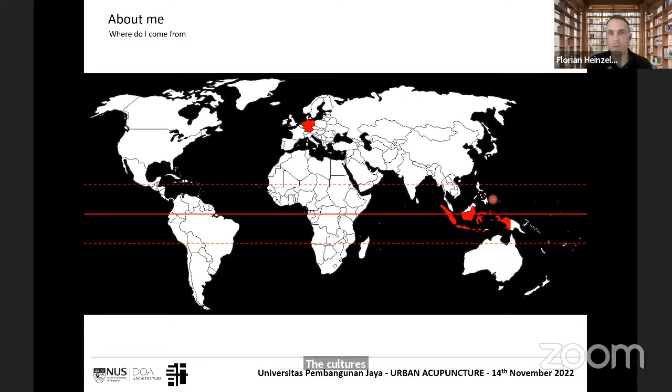Coming from the Northern Hemisphere to Indonesia, having lived there for 6 years and now in Singapore, I had to do a lot of unlearning, relearning, rethinking our architectural practice, simply because the cultures of building are different. A very formalized rational approach, which you maybe learn in Germany or the Netherlands, does not necessarily apply in a more informal economy and way of doing and executing architecture in Indonesia. I find this quite interesting. You will also see later in terms of architectural culture and vernacular architecture.

This is a slide I always show my students at the beginning of the semester. This is an early photo from the pandemic, which was going around in diverse WhatsApp groups in Indonesia. People who are supposed to social distance are not doing it, they're mingling partly without masks. A lot of people were sending this around as a joke, ha ha ha, kampung guys and so on.

But actually what we see here is a really basic design problem. They're putting their shoes as a placeholder, but it's a climatic problem. People always gather where it is comfortable, right? So they're sitting in the shade. If they were in the sun, it would heat up and they'd have no space to sit. So if you want people to behave accordingly, the first thing you need to do is enable a certain level of comfort for them. With some umbrellas and some stools, it would have been easily solved, or at least better. It wouldn't completely solve the social interaction issue because you're queuing, but that's also why it's called social distancing, it's meant to be like that. But if you don't provide the basics, people won't obey your rules.

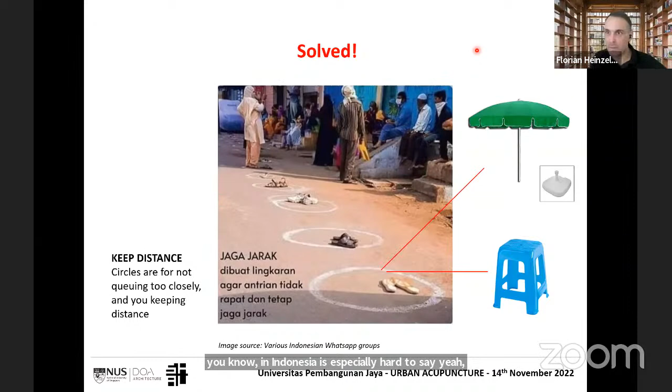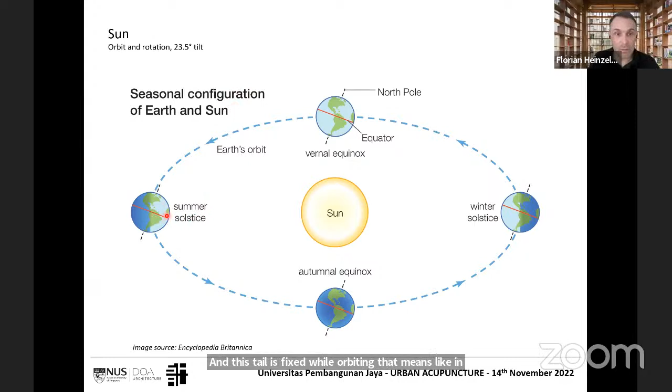Also, what I often show is the very basics—forgive me if you know it already, it's just a reminder. Our planet is orbiting the sun in 1 year and has a tilt around which it spins, and this tilt is fixed while orbiting. That means in summer you have a different angular relationship in this rotational tilt towards the sun than you would have in winter. So for a place where I come from, like Germany or the Netherlands...

If we take the perpendicular towards this point where I'm standing and project the sun angle, I have a relatively high sun altitude in summer and a relatively low sun altitude in winter. But in both cases, the sun always comes from the south. In winter it's cold, so I'd like to utilize the sun for passive heat gains. In summer I'd like to block the sun, because it's getting around 30 degrees, and in recent years even more thanks to climate change in Germany. So I can already design with these angles and have a big influence on climatic design and comfort in the building, and also energy usage—if I can block the sun, I do not need as much air conditioning or heating in winter.

Now if you go to Indonesia, it's an entirely different story because it's almost at the equator—parts of it are at the equator, say Kalimantan, and Java is a little bit south, but it's true for both cases. If you place yourself here vertically and look at the sun angles, in June the sun comes from the north, and in December the sun comes from the south. But the bandwidth of these angles is really overhead, coming from the zenith. So I have a completely different combination of angular relationships of the sun in relation to the climate, because most of the time I'd like to shade the building, and I have different possibilities to do so. So the form of architecture needs to react to that. Again, if you look at the overview, you see the sun path at the equator comes from both sides.

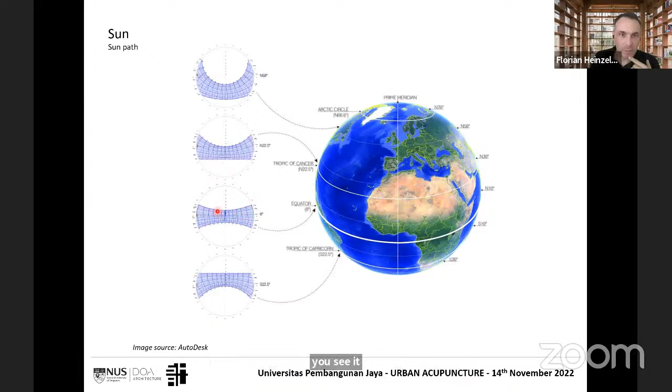Where I come from, the sun comes only from the south, but if you go to Australia, you'd have the sun coming from the north instead. So it's really important where you operate on the planet, and what climatic strategy for comfort and livability you're applying. That's not only about sun angle, but in the larger sense,

we have different climatic zones on the planet. The hot desert climate is much more severe, I'd argue, than the tropical climate we have in Indonesia and Singapore. And of course the humid continental climate in parts of Germany and the Netherlands is completely different, with 4 seasons. So this needs to be kept in mind.

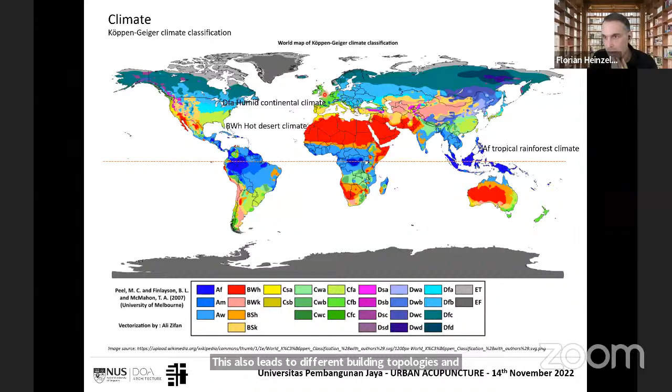Interestingly, this also leads to different building typologies and behavior, which we'll see in a second in these different countries, as an example with vernacular architecture.

In December we have less than 12 hours of sunlight, more like 6 hours, versus in summer a much longer daylight period. That leads to completely different behavior, because in winter we're more inside — it's raining, snowing, cold — but in summer, a lot of people appreciate going to the beer garden, sitting outside, sitting underneath the trees.

So it's a completely different behavior of using spaces, outdoor places, and the city, compared to, say, Indonesia. There, throughout the year, the sun rises around 6 and sets around 6 — you have 12-hour sunlight all the time.

In that sense, sunlight doesn't change people's behavior much, because it's the same throughout the year. For instance, if you have a small son and want to put the kid to bed, it's an entirely different story in Europe than in Indonesia. In Rotterdam, the sun goes down roughly at 10:30 around the 21st of June — full daylight at 10:30 — and you tell a 5-year-old it's time for bed, and they look out the window and say, 'but it's still bright outside.'

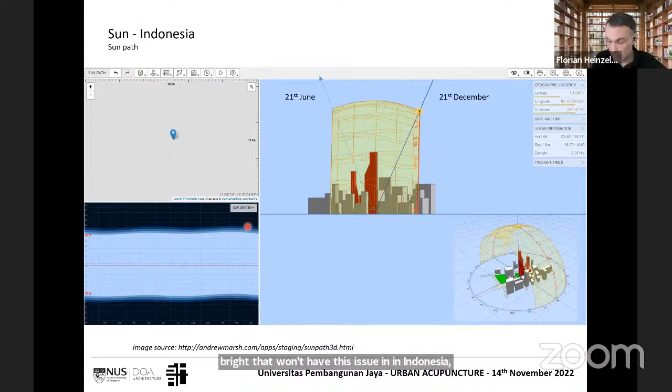You won't have this issue in Indonesia, since it's the same throughout the year. As a comparison, if you go to the North Pole — maybe you remember the horror movie 30 Days of Night — in summer around the 21st of June, the sun never sets, it's 24 hours bright. But in other parts of the year, the sun would need to shine through the planet, which isn't possible, so you have eternal night. So how do we design for that?

One design tool to look at is the psychrometric chart, which maps relative humidity from 100%, 90, 80, 70, 60, 50 and so on, against dry bulb temperature — 0 degrees, 20 degrees, 25, and 30.

What this mapping does is describe a zone of comfort where humans feel comfortable, and in blue it's mapped out throughout the year how many hours fall into which zone.

Generally speaking, there are some differences based on the clothing factor — what you're wearing, how warm or insulated you are — and your activity level, your metabolic equivalent, how much you move around.

But in general, humans feel comfortable between 20 degrees, in the range from 80 down to 20% relative humidity, going up to 25 degrees. If it gets warmer, you need to reduce humidity — the hotter and more moist, the less comfortable people feel.

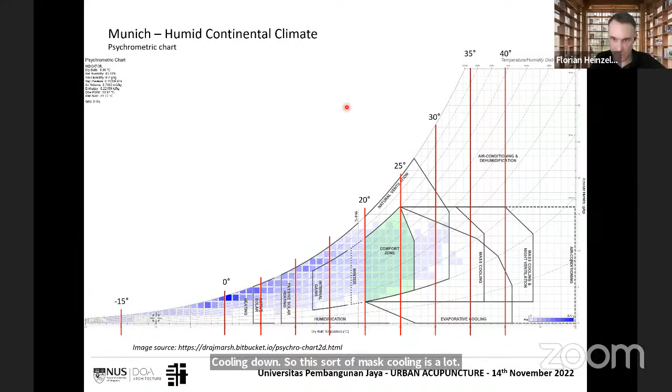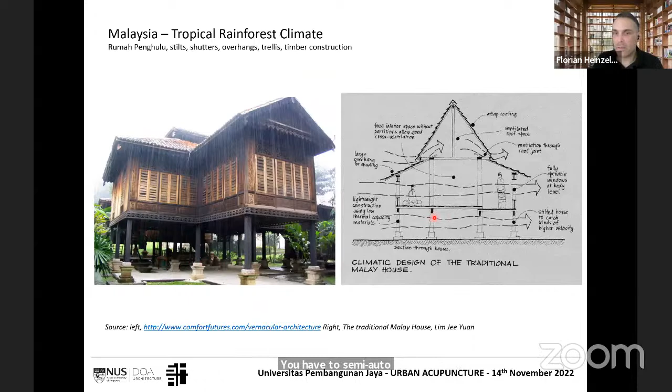But you see already, we're talking about socio-climatic spaces. This sort of architecture is also built around social interaction. You have the semi-outdoor space where in some cases you can sit and mingle. In other cases, you kept your cattle. And if you look around the whole Indonesian archipelago, we have this sort of house on stilts.

Very often, of course, tropical architecture is the architecture, the aesthetics of the roof. It even has, in some cases, implications on certain spirituality, how the cosmos is perceived. But in a way, it's very interesting how a sort of tradition of shipbuilding, timber construction evolved in different places around the Indonesian archipelago in different ways. But it's always building up on this idea of cross ventilation, rain protection, shading, and so on and so forth.

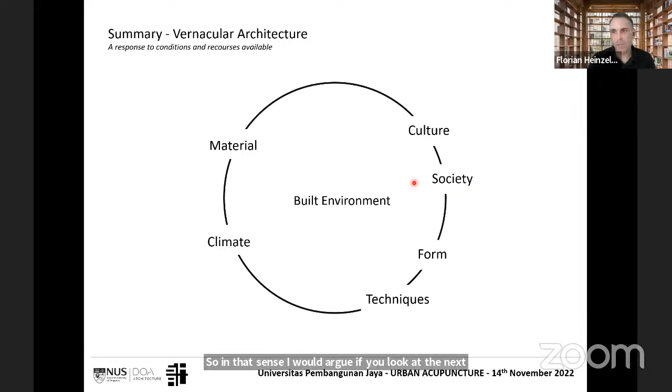So in that sense, I would argue, if you look at vernacular architecture, that a certain region or place on our planet, which has a certain climate, already provides you with the appropriate building material, right? So in the Alps, you have stones and trees. In Indonesia, in the tropics, you have fast-growing plants. You can use bamboo, wood, rattan, and whatnot. And if you go to, let's say, a desert climate, you have rocks, adobe, and bricks, which has

a high thermal mass. And this sort of material climate leads to a certain culture, to a certain society, to certain built forms and certain techniques how to build this architecture. That's sort of like this whole circular relationship where one is, of course, not quite sure what is influencing what. But I personally imagine that it's a process over time where people start to adjust, develop their techniques, but then develop also with the techniques their building typologies, the way how they start interacting. It's a back and forth how this all influences each other.

And of course, with technical achievements like air conditioning, and Singapore is called the air-conditioned country, all of a sudden the whole usage of buildings can change in a complete way. The same like how electricity and the introduction of electric light changed completely the usage of our cities. Nonetheless, I do want to stress that having a look at this vernacular architecture can be a great source of learning.

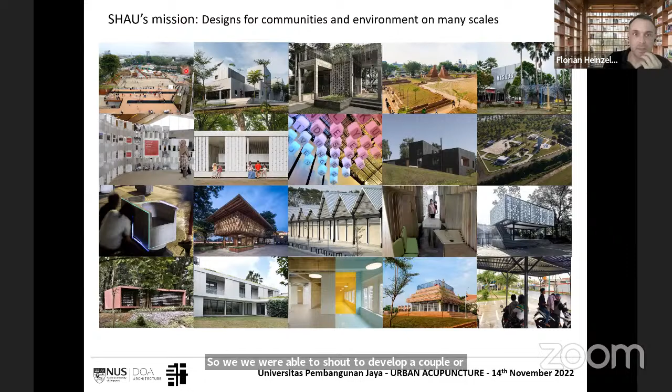So we were able with SHAU to realize a lot of projects in recent years, from public spaces, Alun-Alun Cicendo, to small commercial places in Semarang, to our micro libraries, Alun-Alun Kejaksan, Misbah, a lot of different things. And so how do we translate this socio-climatic design approach?

One of our earlier projects, which was already realized in 2014 for Ridwan Kamil when he became mayor, is Taman Film, because this is, I think, a very good example of this socio-climatic space, and of course urban acupuncture. You must imagine, if you start as a mayor in Bandung, which is also in a way the capital of West Java, there is only a certain amount of things you can touch as a mayor, because some of these streets, these roads, are under the jurisdiction of the governor. So implementation of certain things is relatively complicated.

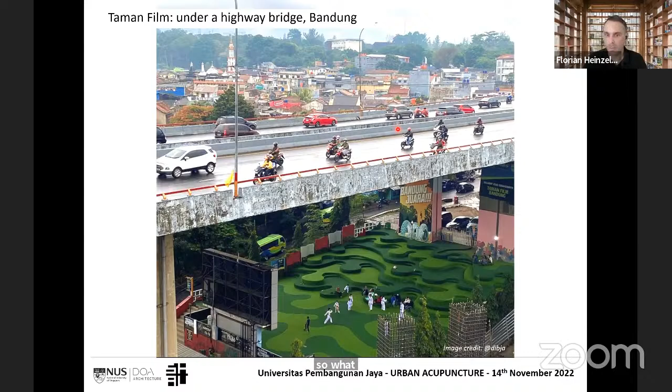So what Ridwan Kamil did is to work on public spaces and touch up certain places. The Pasupati flyover was a desolate place, and he asked different people, partly also his staff, to design a sequence of public spaces underneath the Pasupati, and we were asked to do Taman Film. What we are quite fascinated about is, we learned a little bit from the alun-alun, where the main mosque is in Bandung, and this artificial lawn material.

And it turned out to become what we call an urban living room with this small intervention, and it attracts a lot of people because, with this material, people start taking off their shoes. It triggers a behavior. If it were just grass or natural materials, then probably it wouldn't be that much regarded. So by choosing an artificial material, which reminds people much more of a carpet rather than grass, they take off their shoes and treat it as a living room. Waste management and people throwing things away is an issue in Indonesia, but here, this is astonishingly always relatively clean.

At the same time, having the Pasupati flyover as a sort of roof, and a really wide and open view, as well as air circulation to the side, it becomes really a comfortable space.

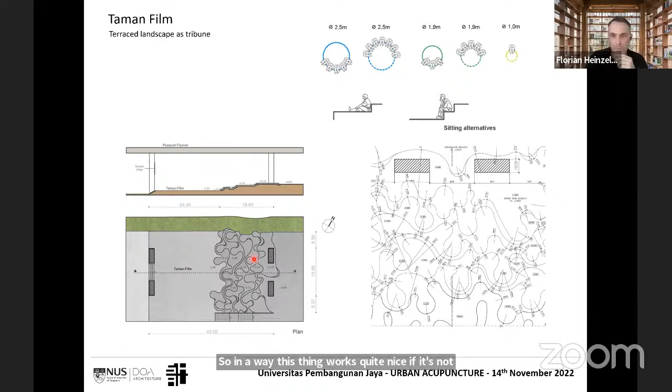So in a way, this thing works quite nice if it's not raining too strongly, because rain won't hit that much. So you're pretty much protected, and it's really a space for social interaction, and kids to play, and people felt safe. So you see, they put their babies inside these little pockets, and it's quite a well used and well perceived space in Bandung.

And here this was, I think 2016, if I'm not mistaken, or 2015, when Bandung won the football cup. So people went really crazy and occupied the whole Taman Film for live streaming, live watching Persib playing the finals.

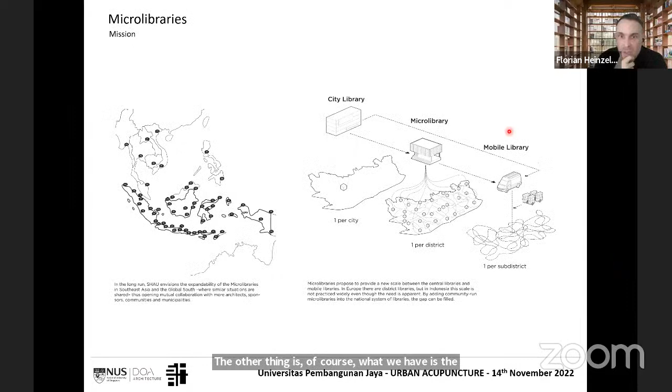The other thing is, of course, what we have is the micro libraries, and I want to show you three examples. And our mission or our idea is to have more micro libraries, as many as possible we can build over Indonesia. Because the literacy rate is okay, but the interest in reading is not so fantastic. As you probably know, reading during your school time was some form of punishment. So the issue is, if you have a city library, the threshold might be too high because it's very institutional. People do not want to go there, and it's maybe a bit far away.

You need to drive. If you would have, on the other hand, a mobile library, which there are a couple of initiatives, especially in Bandung, then of course it provides books, but it's very utilitarian. It does not provide really that much of an identity. So we decided, okay, we want to be somewhere in between a mobile library and a city library, having a lot of smaller libraries within the city, because with Taman Bima, with the ice cream bucket library, and also with Warak Kayu, and also with the Hanging Gardens, it becomes somewhat a little bit iconic, right?

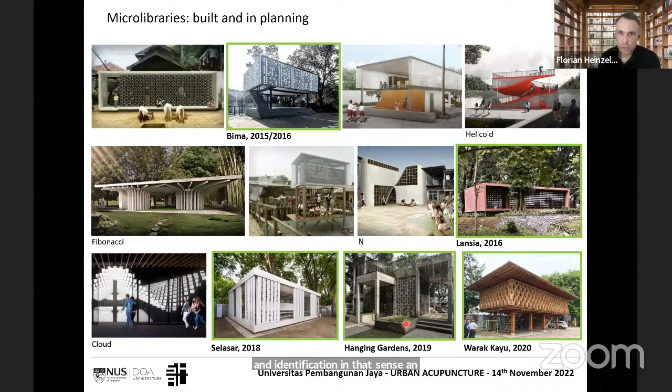And with this iconicity, you have maybe what you could even call a micro Bilbao effect. I don't know if you know Bilbao before the museum was built by Gehry. It was not on the map, and then all of a sudden you build this museum, it becomes a tourist attraction. We don't want to go that far, but by building a micro library through this insertion in a very small spot, you create an identity for the neighborhood, a meeting point, and a point of pride and identification. In that sense, an iconic building can contribute and help tremendously.

Also, what is very important if you do these micro libraries, and now we come back to the social aspect, and I don't want to talk so much now about the climatic aspect because this always has to work, but how to initiate it and how to have this microlibrary running. So you need a strong community and you need somebody who's staffing the library, but it also needs to be supervised and these people need to be taught. So we always work together with funding partners and NGOs.

And over the years, we have some more successful and some less successful libraries, and it's an interesting learning process, because this is also something I at least underestimated coming from Europe, because a lot of people there are active in clubs, training kids on a Saturday playing football, or they are in reading clubs and stuff like this. But since we are very affluent in Europe, we can afford it. So you need to be able to afford volunteering. Your belly must first be full before you do this.

And when we worked in Indonesia with volunteers, there's always also an interest in making money and making a living. So for instance, our microlibrary Hanging Gardens in Bandung, they turned it into a cafe, and all of a sudden it was more cafe than library, right? So you need to integrate and start changing your mindset a little bit. In case of Warak Kayu in Semarang, there was already a charity organization feeding the poor, and they very much liked the library as almost like a new headquarters, right?

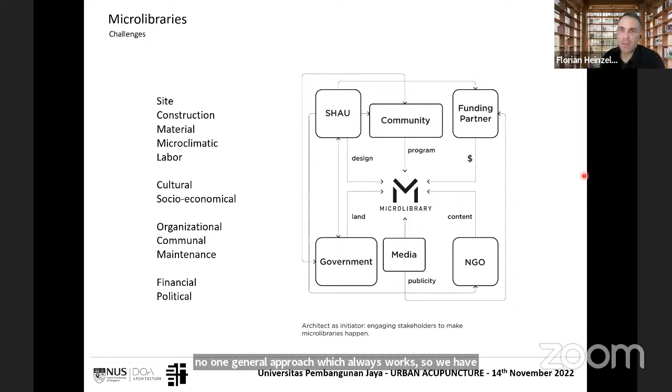They were already busy. So you always need to think about the whole social layer, the whole social construct when establishing a microlibrary, in terms of maintenance, in terms of construction, in terms of especially who is doing the activities and who is staffing the library to make it work. So this is a sort of rough diagram, but every time we design a microlibrary, this needs to be filled in freshly and newly. There is no one general approach which always works. So we have to be very contextual and site-specific in designing them, not only in architectural form, but also in how this whole construct of people behind it can work together.

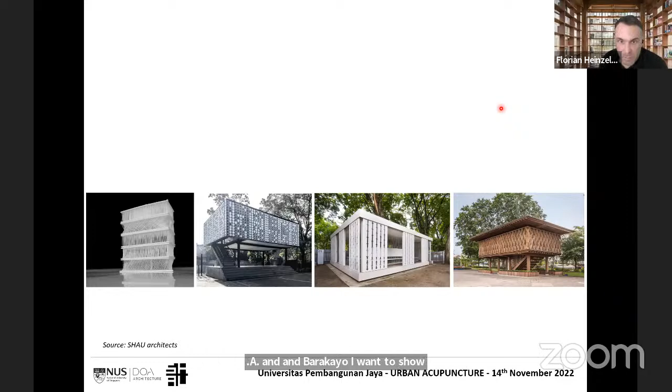So the three projects: one is not a microlibrary, this is a Beads House, but this is a very influential, still influential work. Then Taman Bima, then Selasar and Warak Kayu. I want to show there also a little bit the construction and the socio-climatic spaces, how we see this.

So the House Without Doors was a competition for young architects in Jakarta in 2011, so maybe two years after we started. And we came up with this Beads House because we were thinking, okay, if you have a house in a tropical climate, and if you could somehow get rid of the mosquitoes, you would actually not need any doors at all, right? And if you could have a satpam sitting there controlling who goes in, you don't need any facade either.

So the whole idea was to have a floating roof sitting on four pylons, and all the program inside the house is defined by more or less density of glass pearl curtains hanging. So you basically can walk into this house wherever you want. You have a higher density around the bathroom, a little bit more density towards the garden on that side. This is relatively open, but you can always go through.

And this whole idea is, as long as I'm protected from the rain, as long as I'm shaded, and as long as I have enough cross ventilation, which the beads can do, I can live perfectly fine, right? And this, of course, in a way is opposing, even if not entirely aesthetically, some form of modernist idea where you always have this very thin glass layer. Take the Farnsworth House, let's say, the continuity of the garden.

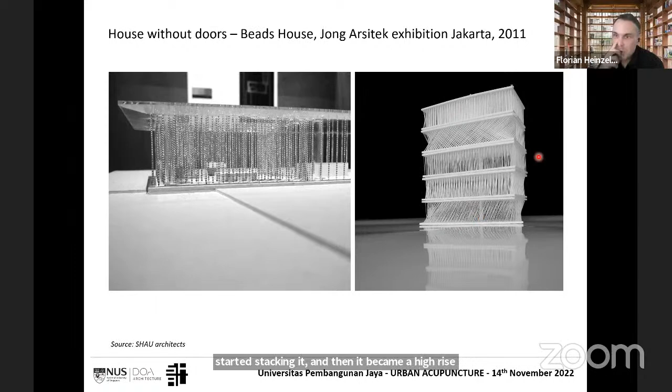This sort of lightness is something we would very much like to achieve in architecture. And with that, of course, you have a different degree of social interaction and possibility for people.

So the Microlibrary Bima in Bandung, coming now to the urban acupuncture part of the lecture, is actually a quite interesting situation, because not far away is also Alun-Alun Cicendo. The whole neighborhood is defined by scooter and small motorcycle mechanics, spare parts and the steel industry. But if you go along Jalan Bima, you have Taman Bima, this horseshoe-shaped park. And you can already read it here from the building mass.

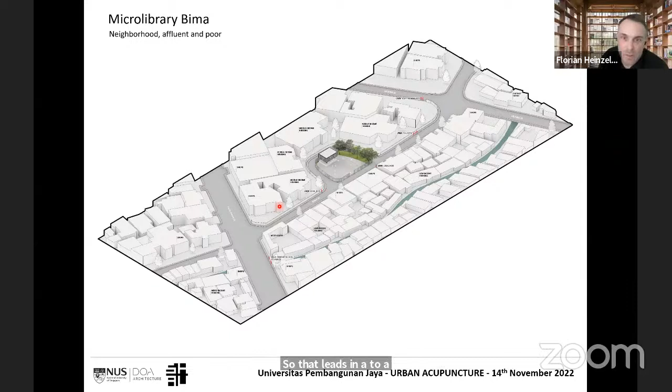So you have the kampung on one side, and middle-class houses on the other side. That leads to a somewhat bizarre and potentially conflicting situation, because the whole taman, where you can play football and so on, is actually catering for all the people from that side, while structurally it is much more embedded through the street, separating these two sides, into the middle class, which is actually not so much participating in this public space.

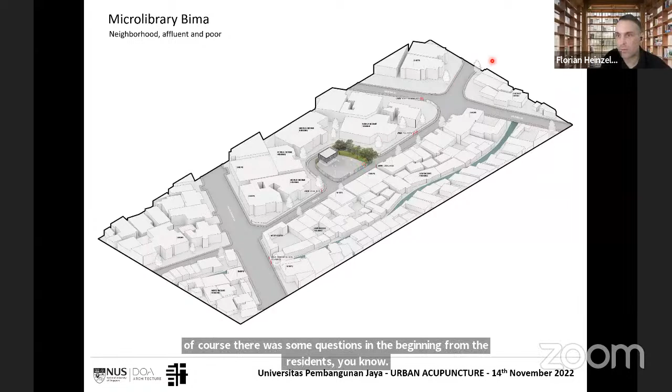So of course there were some questions in the beginning from the residents: can people who go to the library look into my front yard? And they were afraid things got stolen. But in a way, with the facade design and sort of framing with the small buckets, we think it works quite well. But this is also something in terms of urban acupuncture, where you have to be aware that your intervention literally redirects streams of people, and not always for the better. So you have to be really sure that it can improve.

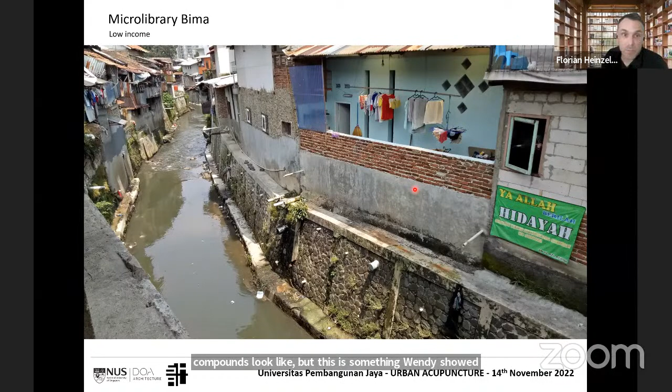Part along the river here, I mean, you probably know how kampongs look like, but when we show these projects to an international audience, we need to explain a little bit what the living conditions are and how people live in Indonesia, because they're not so familiar with that. And on the other side is the middle class housing. So we took an existing stage which was used by the community, and we remodeled it. We didn't want to throw it away, and then we started to build our pylons, our columns, where we then have the floating microlibrary as a rumah panggung, house on stilts, above it.

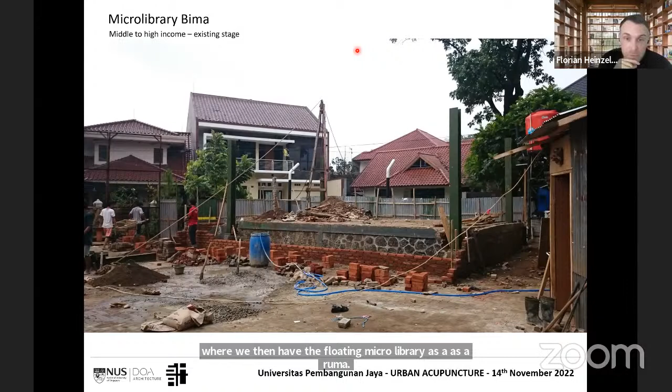So the reason why we did this as our first typology was frankly not so much because we wanted to relate to the Indonesian vernacular typology, but it was very pragmatic, because if we had put it on the ground, we would either have to take away the football field in front, or take away the stage where people are meeting. And by elevating it above the stage, we generate a semi-outdoor space, which is then usable. We don't take away, we're adding value to the place.

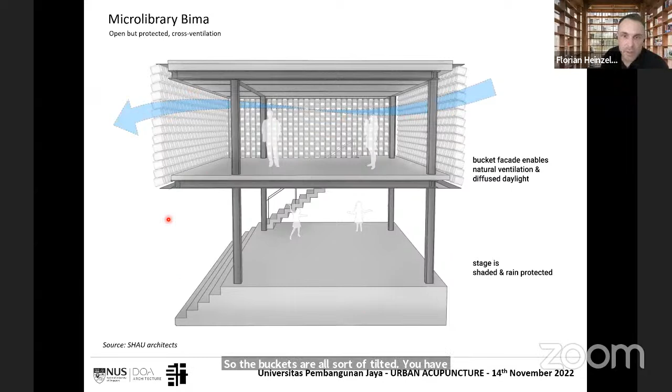And later on, with discussions and giving presentations and lectures, we understood that we actually quite organically, in a way, reinvented, if you want to say so, an Indonesian vernacular typology. So the buckets are all tilted. You have cross ventilation. The stage is rain protected and shaded underneath, so it becomes truly a multifunctional building.

And if you look on the inside, you see all the buckets. They filter the light very nicely, they reduce the heat gain, and cross ventilation is still possible. If it rains too hard, then all the rain will be blown inside. Therefore, we have these translucent polycarbonate sliding doors. But in general, if it's just a little bit of drizzle, the rain goes into the buckets and then can run out to the outside. The closed buckets have little holes down there, so the water can run away.

In that sense, it also becomes a sort of daylighting device, because the buckets, with this 1 millimeter thick translucent plastic, diffuse the light in the interior and spread it very nicely. So you have good readability. You don't need so much electricity while operating the library, because the daylighting, the natural lighting of the library, is quite good, quite effective.

And during the night when you turn on the light, it becomes a lantern, so it works exactly the other way around. It starts to radiate to the outside and becomes this little Bilbao effect, a beacon of knowledge for the neighborhood, and contributes greatly to the identity.

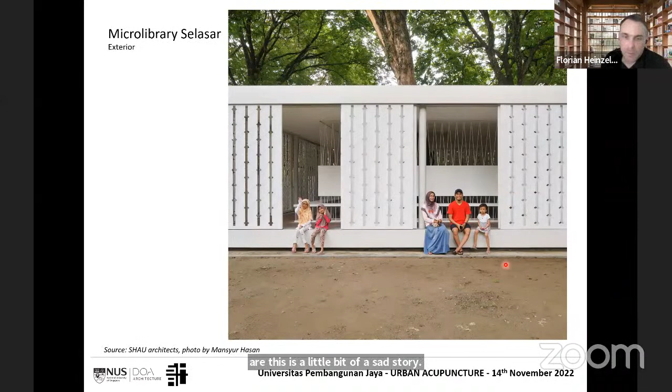Now, Microlibrary Selasar, this is a little bit of a sad story. This is in Bojonegoro. It was sponsored back then by an oil company, let's say, and was initiated by Kang Yoto. But when the next regent came, she decided to tear this microlibrary down. So it was never in operation. But it's a different situation urbanistically speaking, because this is in a park. So we have these two different types of microlibraries.

One is more an urban dense situation, like Taman Bima and Warak Kayu, but then we have those in the park, like Lancia and Selasar. And of course, with the park library, you can play much more with the surroundings, to let that in. And there are a lot of other facilities, so you cater a little bit for a different context.

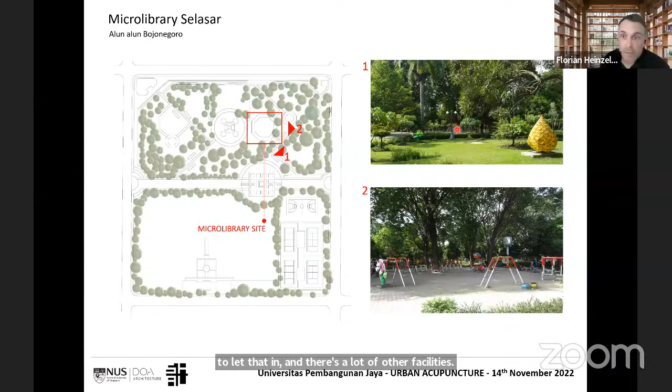This park in Bojonegoro is very nice and very nicely maintained, so we decided to work more with these park features. If you're Indonesian, you know the selasar typology found in universities: a covered walkway for when it's raining. You can go from building to building staying dry, and if the sun is shining, you're shaded and comfortable, able to walk through campus as a pedestrian without jumping into your car.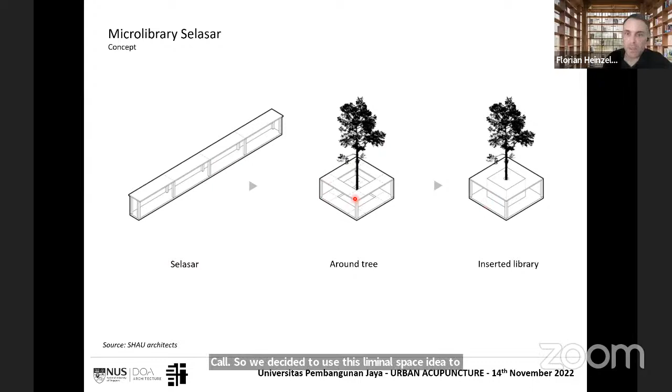So we decided to use this liminal space idea to wrap it around a tree and use it as a buffer zone, inserting the library inside. You can see this building as a box, but actually it's the library with a very big roof overhang which becomes a veranda, where you can use sliding doors to block the sun if required. You can use this space for social interaction and reading, so the selasar literally becomes a social space of interaction, while you always have cross ventilation.

So we were working with a spanduk, and we made this facade mock-up. This is also something we always want to think about - the materiality, how to work with different materials in a new way. You see this was the first strip we folded in the office and put together with stapler pins. We made two of them, and the other one is just Photoshop, but you see the effect it's doing.

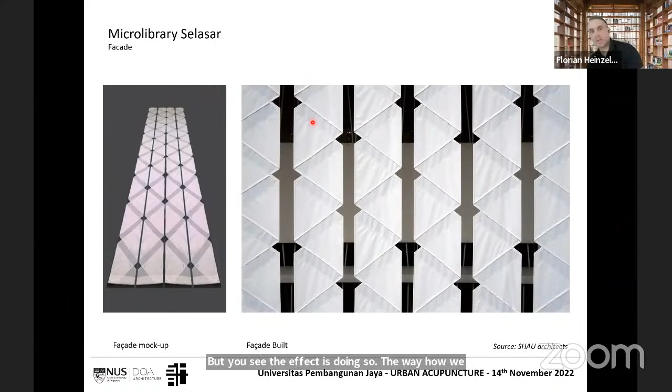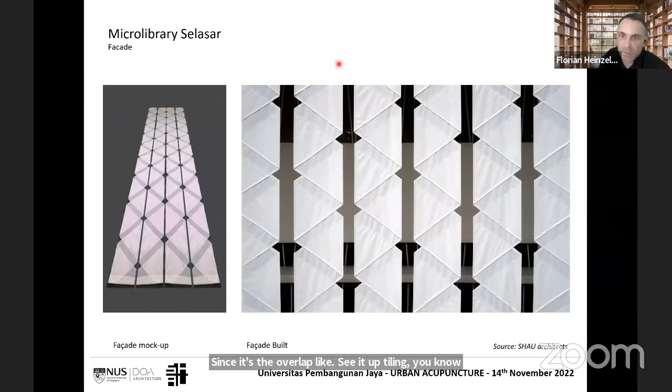The way we folded it is also in response to the local climate and the rain, because it's always folded over and over. That means if it were the other way around, water would creep inside. But since it's overlapping like roof tiling, always overlapping to the outside, rainwater never stays inside, meaning less mold. You also see it's slightly different in transparency: 100% transparency, then double overlap is less transparent or less light transmittant, and where there's a single layer you have more light transmittance. So you have this pattern visible inside and outside, and it's filtering the light nicely.

So finally you have the microlibrary Warak Kayu, which was built in Semarang in 2020. I think it's the first mass engineered timber building, also FSC (Forest Stewardship Council) certified in Indonesia, done together with Kayu Lapis Indonesia. This was really a project we had great joy designing and executing, because it has a certain level of precision and craftsmanship through the Kayu Lapis factory, which we very much appreciate.

We learned from Bima, with the house on stilts, that it can generate a space underneath which can be used for something else, more informal than just the library itself. If you look at the insertion, the acupuncture within the urban context of the neighborhood, it's a little different than Bima, which is really just the neighborhood. With Warak Kayu being on this busy Jalan Dr. Sutomo, it becomes much more exposed, and with the food court and cafe on top and a bus stop, it is better embedded in the urban fabric.

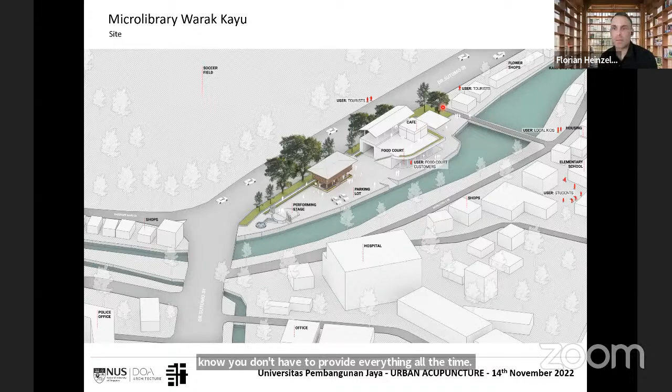Now, we don't have any toilets or anything other than water for watering the plants. We don't have that there, because the food court, in a way, is providing it. I think this is also like sort of with urban acupuncture—you don't have to provide everything all the time. The idea is also to have synergies with the surrounding context, see what they are offering, and participate, creating synergies.

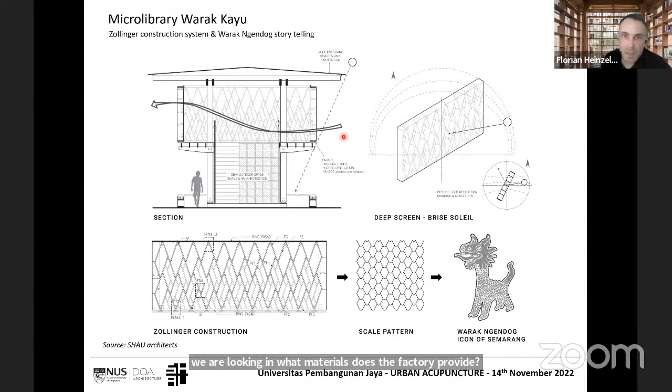We came up with this brise soleil deep screen from Zollinger Construction, a German construction principle from the 1920s, which we thought was quite interesting and adequate, because it's a reciprocal system where one board holds two other boards, which hold two other boards, and they're just bolted together. In a way, it represents a more industrialized timber architecture rather than pure craftsmanship.

While we were designing this, we discovered that these diamonds look like scales, and the scales could relate to the local icon of Semarang. Hence we named it Warak Kayu, from Warak Ngendog. So this becomes part of the storytelling, and this narrative is very important to anchor the building in the minds of the people.

While designing this, we looked at how dense this facade screen needs to be, how deep it is. We did some shadow studies. The lighting studies I did later with simulations in ClimateStudio to show my students, in response to the building's orientation and where the sun comes from at different times of the day—how the screen performs—as a sort of evaluation afterwards, which I like to show my students.

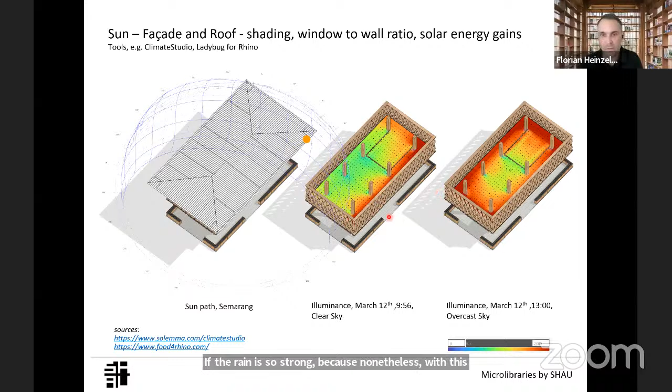Because what you want is enough light inside the building that you can read without artificial light. You don't want direct light inside because it heats up and becomes too hot. You want enough cross ventilation to keep cool, but also the possibility of closing if the rain is too strong, because with this rain overhang, if there's a tropical rainstorm, it gets completely wet inside. So you can see the transparency during normal operation.

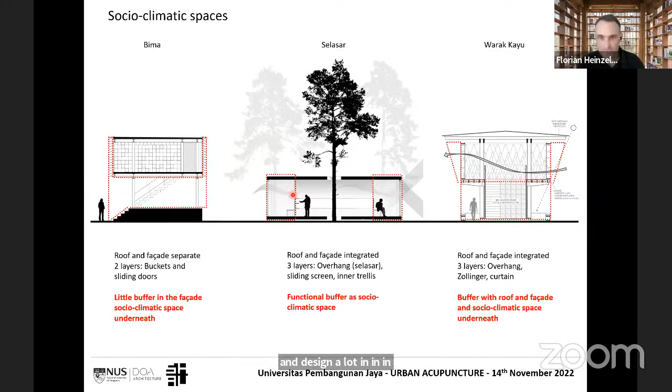This is something we really like to think about and design a lot in our architecture. Remember the Batam shipyard building, where we have sort of a stretch around, so if it's raining, it's not so problematic because the rain doesn't go to the core programs, but here it's simply not as occupied or occupied differently.

So now going to Uma Betang Umai, our Wakil President design for the new capital. It goes a little bit away from the urban acupuncture, but I would say this is a very urban, even though it's an architectural design competition, it has to follow a lot of urban design principles. It's about accessibility, public space, how people get in and out of this complex, how it's accessible via public transport, public green, and of course climatic design aspects play a major role.

We won with another office second prize for this, and to be frank, I don't know how this project is going to develop further. It's not so easy not having one winner but two, and having this sort of negotiation. So we will see. I will just present you now our design ideas and design principles behind Uma Betang Umai.

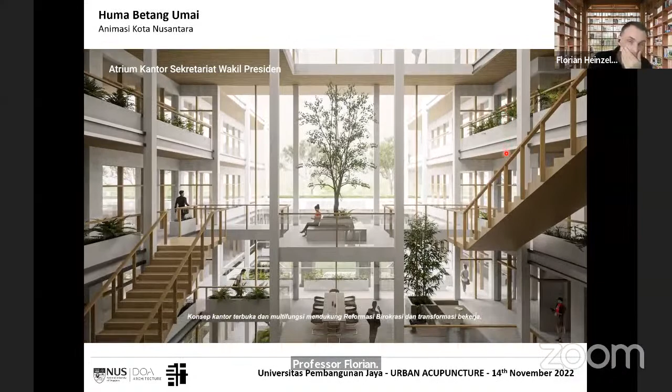Does this video have no sound, or can we not really hear anything? Okay, yeah, then I'm sorry. I would suggest you look it up on YouTube, we have it there too. I will send you the link after, let me look up the link, and then you can have a look. Then I will just explain it. So

Yeah, the new vice presidential palace idea. So what was important for us, of course, is again the whole idea about sustainability.

The whole location is monoculture of palm trees, there's some natural forests left. So the idea of a carbon neutral building, if not carbon positive, hinges around the absorption of CO2. And now the question, if you build a new palace or a new city, even in a new location, you have a lot of building materials which you have to ship over, and you have to make up for it. Therefore the whole landscaping and reforestation is really part of the design strategy.

Also the idea of producing electricity, and I will show the example of the School of Design and Environment here at NUS, the newly built SDE4. But the whole idea behind this palace is how can we tie into this whole master plan from Urban Plus, which is playing a lot with regenerative technology, green energy, but also public transportation, and reducing our CO2 footprint.

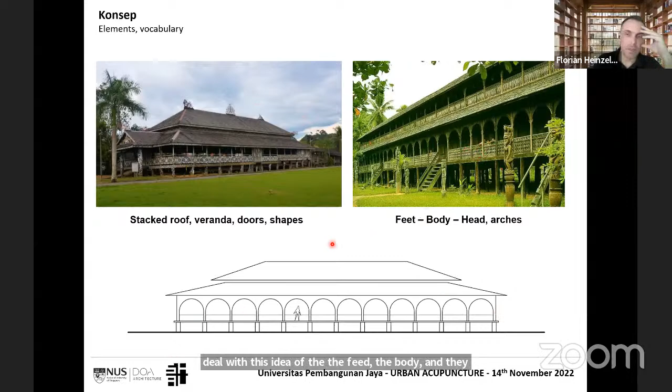As part of Architecture Nusantara, you always deal with this idea of the feet, the body, and the head. In this case, we implemented these arches, which we saw in the local longhouse, Dayak longhouse typology, but in a way we reworked that. I think as architects, we have the freedom and also the obligation to not just blindly follow a certain typology, but to rework it and make it work, and take what we think is good.

In this case, you have the porches, you have this sort of open house idea, and the openness is very important. Of course, if you sit on top of the hill, it becomes again iconic and very visible. And we had in the recent presentations a lot of discussion about the roof.

And I hope to refrain afterwards in this Q&A from this discussion. I am not willing to discuss it anymore, because we make a flat roof simply because we have the possibility for 8,000 square meters of PV panels. And in Indonesia, or at that location, an inclination of 4%, relatively flat, is the most ideal. And if you want to fuel or power the building plus all these neighboring buildings, it has to be like that. Plus, technology moved on.

Back in the day, yes, we needed the pitched roof to get the water away, but technology is there to have these smaller pitches incorporated without the building drowning or having water damage. Nonetheless, we integrate certain elements of local architecture into the building. And with this gesture, this sort of inverted roof on the hill, you see it is a very open gesture, a very open form in opposition to a closed one.

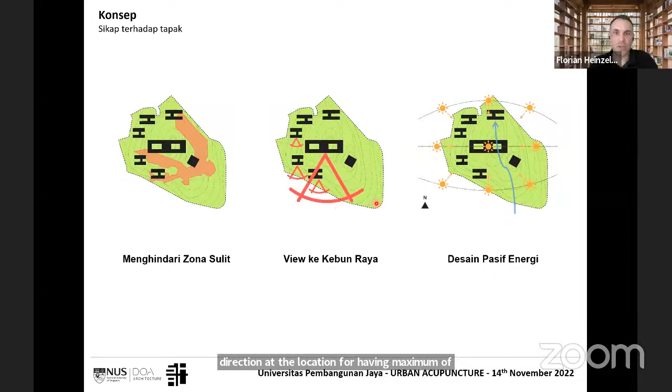So we're also looking, of course, at the local climate. It is getting hot, but interestingly, if you look at the general sun direction, north-south is easily shadable with overhangs; east-west needs to be more closed. So we structured the whole massing of these buildings with long sides north and south, which then also correlates to the major wind direction at the location for having maximum cross ventilation ability.

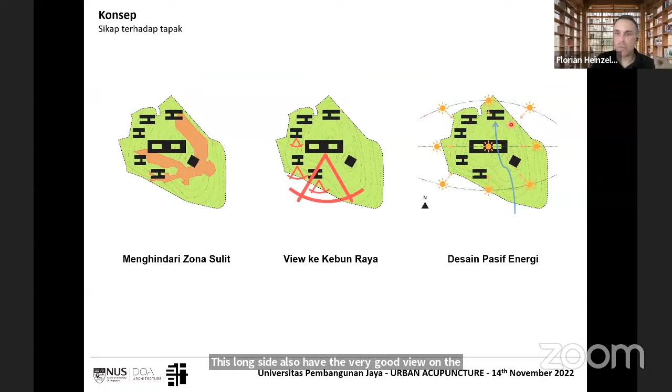So we placed the different offices and the palace on top of the hill, outside a sort of geologically not very buildable zone. This long side also has a very good view of the botanical gardens in the south. And with the north-south orientation, we can use overhangs to easily shade the facades and reduce solar heat gains. So this is the master plan overview.

And what we also took great care of is the accessibility. So the idea is to do exactly not what we used to do maybe in Indonesia, that everything has to be reachable by car, but really thinking of it more like a campus. For instance, Universitas Indonesia has a very nice campus where you have these different buildings. So in a similar way, everything here is connected with a system of walkways. So this animation is working now.

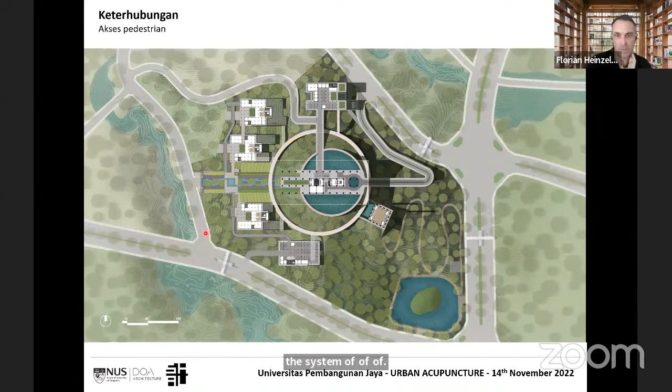So if you work there in these offices as part of the administration, you come by bus, you can enter via this main plaza with a very interesting stretch of stairs and landscaping. But of course, nobody likes to use stairs. So we have this funicular built in, which brings you up to this level or up to the palace level, but then you have the possibility to walk around completely.

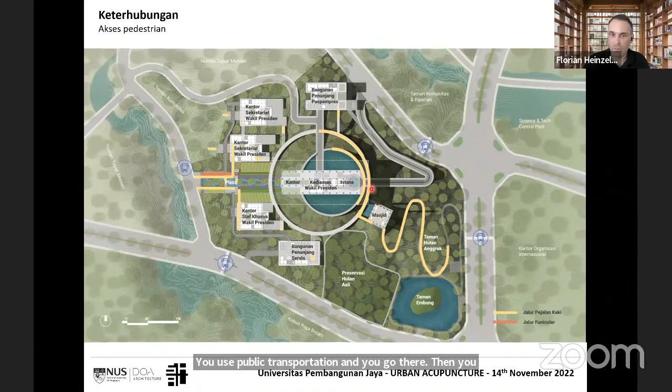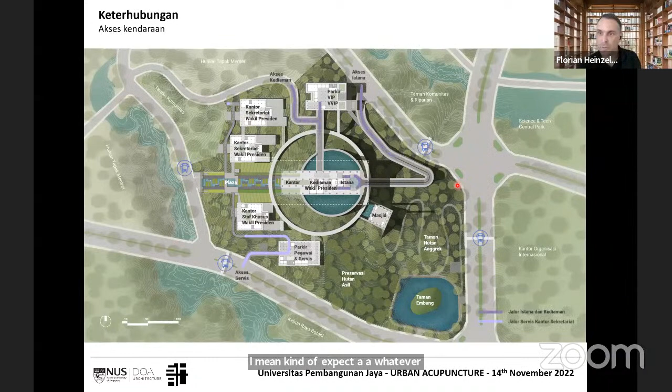So you leave your car at home, wherever you live, you use public transportation, and you go there, and then you can be shaded and rain protected and walk around and arrive at all these different locations as you need to. Of course, with vehicular transport, we need access for services, and for the vice president arriving at the palace, but also for the guests. You cannot expect a vice president from another country to walk up the hill or use the funicular, the little train. So therefore, there is some degree of vehicular and individual transport present.

We also like to think about this whole not only as a set of buildings, but as a set of buildings that in its totality has developed some synergies, right? So we have green roofs on most of the buildings, simply because if you had photovoltaics, it would be very reflective. So for the microclimate, we have here green roofs for rainwater collection.

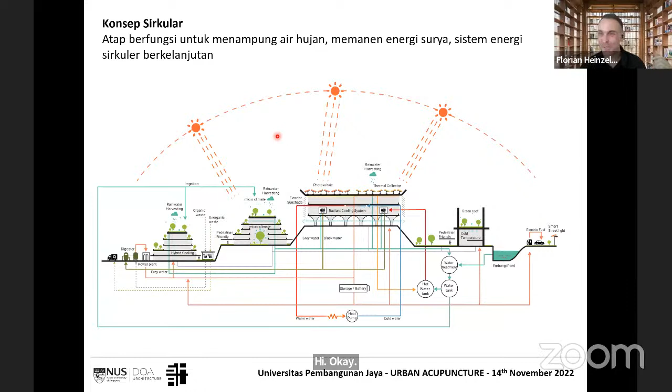Who muted me? I'm almost done. You can mute me in a second. No, sorry. Someone must have muted you by accident. No problem.

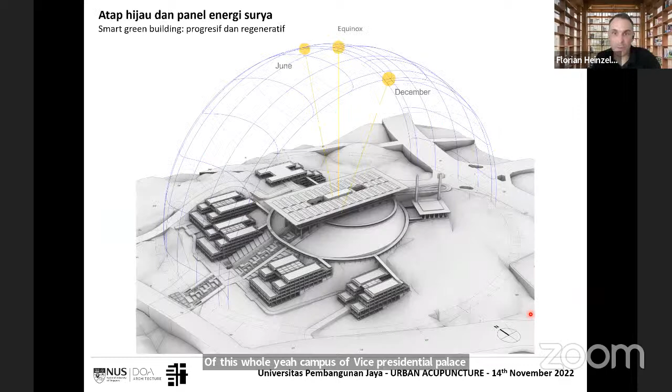So with all these different sustainability measures, we want to enhance the microclimate, reduce the operational energy usage, but also increase the livability of this whole campus of vice presidential palace, office building and mosque. So, the sun studies look at the different sun angles. You see the overhangs are designed in such a way that they're always shading this facade.

The east-west facades are kept smaller, especially the west facade, where you would have a lot of heat coming in in the afternoon. We have external sun shading in the offices as well as the palace, looking at the general wind direction and designing accordingly. All the office buildings have courtyards in the middle, also being a sort of social and interaction space. Here you see how it looks from the roof. Like I said, we have all the green roofs.

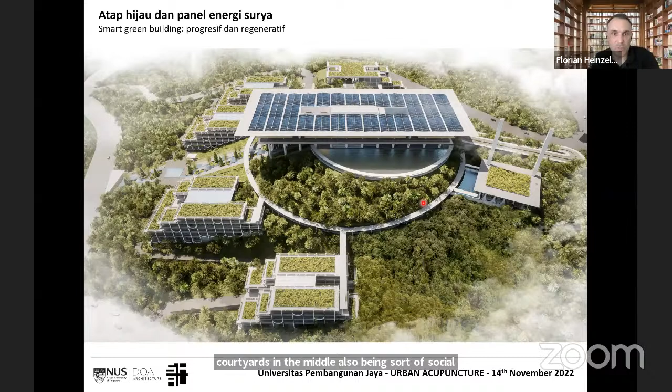Green roofs are fantastic buffer zones. They keep the moisture, they keep the water, it evaporates, it cools the building underneath, but it also helps with the water management. Like I said, we don't have solar panels up there because if you would look down and the sun comes from a certain angle, you would be, say, blinded, or the glare would be an issue. But also, if you look outside the palace, part of this building is becoming part of the landscape, and it's not so obstructive anymore.

Then you see here our big axis of stairs where we have the presidential walk. You see later that we always integrate the memory of the previous presidents of Indonesia, and everything is then connected via this Selasar, where you can go towards all these different office buildings, mosques, and the palace itself.

So we also studied a little bit how much energy we could produce, and in our original design we have 10,000 square meters of roof surface, and if you occupy 8,400 square meters, we can conservatively estimate, based on the global atlas, to produce 2.56 gigawatt hours annually. If we take SDE4 as a comparison, we could even produce more. And if we have, let's say, hybrid cooling, not everything fully air conditioned, we could potentially run the whole palace independently from any electricity, and even provide surplus to the office buildings around.

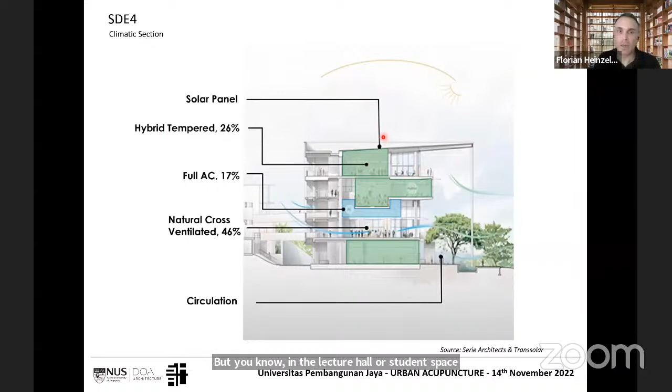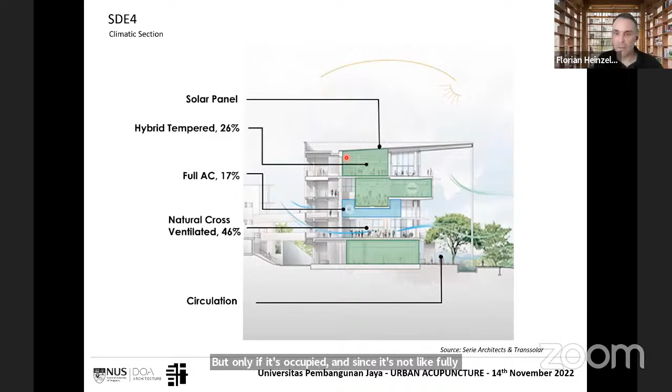The east and west facades are very closed to shade. The overhang on the south side is also long enough to shade. And then you have different climatic zones for different usages, where you have full AC in some office spaces, but in the lecture hall or student spaces underneath the roof, you have hybrid tempered spaces, which use much less energy than a full AC space would. There are fans on the ceiling, and chilled air which gets distributed by the fans, but only if it's occupied. And since it's not fully AC, just chilled a couple of degrees and not to 18 degrees, it uses less energy but provides the same level of comfort.

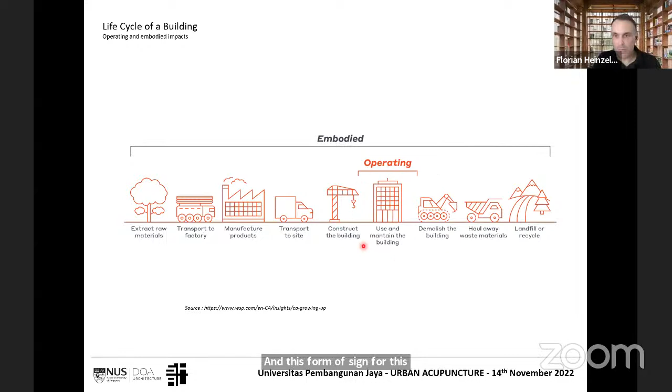And if you look at this, with almost 600 megawatt hours of electricity production measured in 2021, only 470 is used, and the rest can be used differently. So I would say, if you build a new palace, a new capital, you have the obligation to be as energy neutral as possible, and if not, CO2 neutral. Therefore, there is no other way around than implementing photovoltaics and this form of design for this location. Because at the end of the day, operating energy is a relatively small part, but embodied energy, gray energy, from extracting the materials, transporting, manufacturing, is the bigger part. And this is sometimes something you do not have under control as an architect.

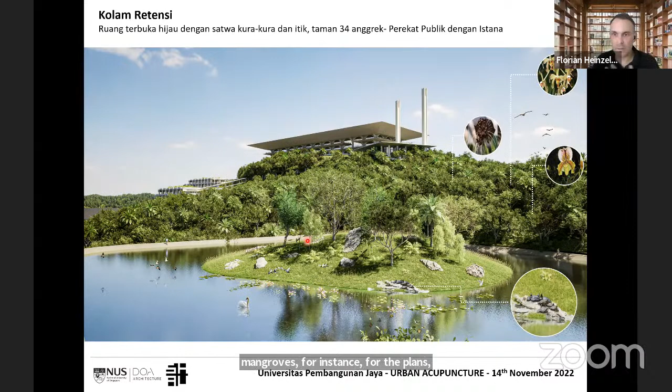Therefore, again, this reforestation, because mangroves, water plants, and forests are CO2 sinks. So we have a very big piece of land, and by reforesting it and making it really dense, lush and green, we have the possibility to offset all these carbon emissions from the construction process over the years with the forest.

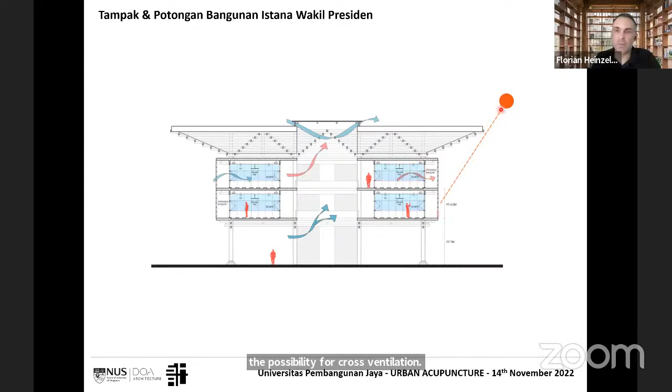So the palace is built around several courtyards, because then you have also the possibility for cross ventilation, the chilled ceiling, fans distributing the air, the overhangs, and even external shading if need be.

Then if you arrive towards the palace from the west side, so if you work there, you have these big steps, which you're brought up by a funicular if you don't want to walk. Of course, in a way, it also fulfills a certain healthy agenda. So if you walk the stairs every day a couple of times, it would be good for your physical health as well. But it becomes also a great iconic spot underneath the roof.

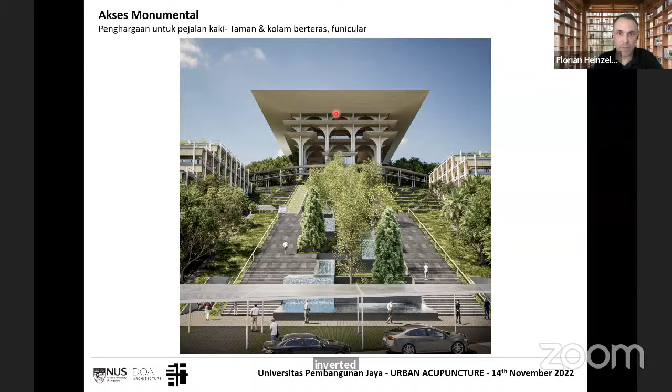This is also one of the reasons why we inverted this roof, because you're standing at the bottom of the hill, and if you look up, then you see this more or less inverted pitched roof, and it becomes a fifth facade in that sense, which you can observe and perceive.

So if you come up to the upper plaza, you have the presidential walk, where in these water features we have this idea to integrate all these memories of the previous presidents, and you can walk around as a pedestrian. Here underneath the palace is the big function meeting room, press conference room, always related to the surroundings. You can have this great panoramic view.

And so in that sense, this transparency is also allowing people working there, and tourists as well, to participate, not necessarily sitting there, but participate in viewing how democratic processes are executed and lived. And the big reflection pond at the palace, and these covered semi-outdoor spaces.

And finally, for the offices themselves, the facade design. On all the east-west facades, you have extendable louvers, which can be put down to minimize the heat gain. Like I said, a green roof is good for water management, but also for cooling the building underneath. There are studies: a barren concrete roof heats up to 50 degrees Celsius, but a green roof with evaporation is only 27 degrees, even though it is 30 degrees outside. Overhangs on north and south sides also block the light.

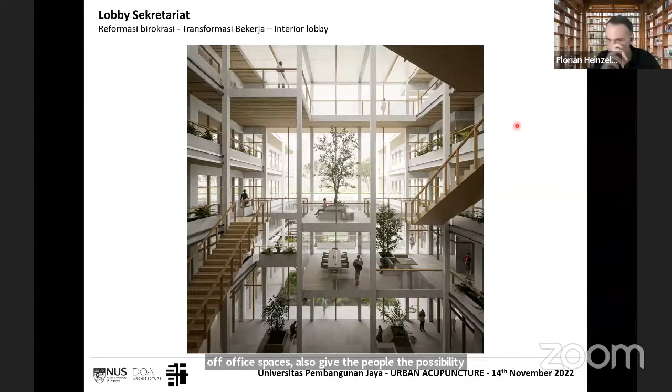Again, a hybrid system, and a social space in these courtyards for interaction, where people can meet and mingle and talk with each other. Instead of having locked-off office spaces, give people the possibility to mingle and interact within the building in comfortable spaces, and live democracy.

And with this, I am done with my presentation and lecture. I hope you enjoyed it very much. I'm a little bit over time, but I think it's still okay. It's not a problem. We really enjoyed it. Thank you so much.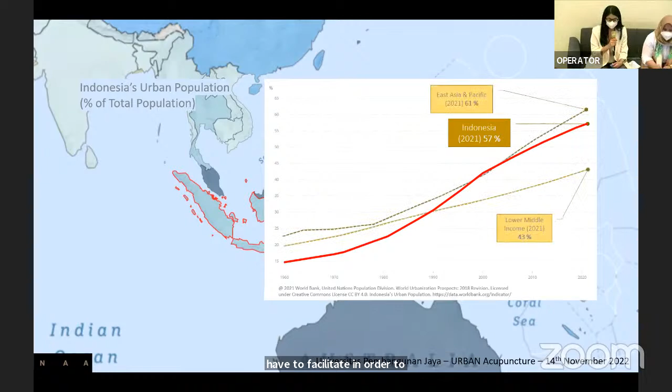So as we know, if we have a lot more population within a city, we have more interests that we have to cater to within the city. And this is causing a higher probability of conflicts. For instance, in Jakarta, we have a lot more people living in Jakarta. There are issues in regards to density and also diverse cultural backgrounds, diverse needs of the citizens, which have diverse economic levels, educational levels, and other socio-economic factors that cause an issue for city managers and also the public sector, in this case, the government, to create a livable city.

So it's really problematic when you have a certain area that is highly populated and also a lot of problems that occur in one place. So that's why urban designers are very much needed in order to help the city managers and also the government to solve or to facilitate issues in creating a better environment. So we all know that there are a lot of urban issues and challenges that the government and also us as the citizens, as the users, face on a daily basis.

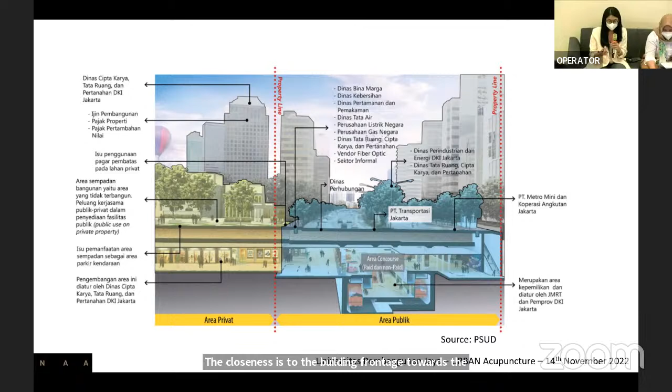And to create that, PSUD had to negotiate with every parcel of land along the main road and talk to the stakeholders about why it is important to have that kind of environment in order to make the city a better city in the future. And I think that's one of the most successful movements PSUD has done, and it has continued now, especially with the development of the MRT, which makes the city center more vibrant, lively, and more pedestrian friendly.

Before I continue to the process of urban designing, we must know that there are a lot of types of works that urban designers can produce or provide as an output. This is what we as urban designers can offer as a consultant to private or public sector. So there are four major types of urban design work.

First is the total urban design, where the designers are also the people who are involved within the development from the inception to the completion of the project. One example is Brasilia, a new capital city built as a strategy to create a better city than the previous one they had.

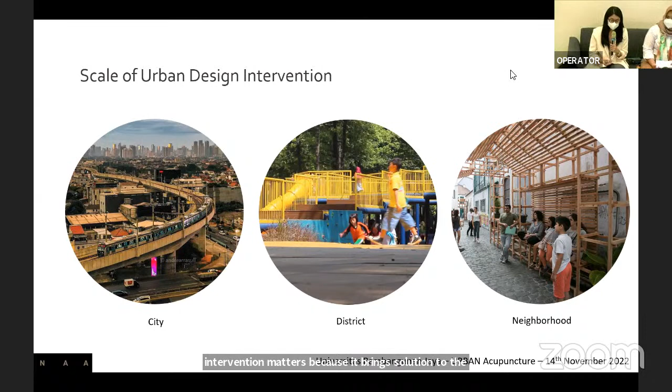In this context, I would like to explain why urban design in Indonesia is special: because we have a planning system that is the foundation of what urban designers do. In the Indonesian context of spatial planning, every product of urban design has to comply with the development plan and also the general spatial planning down to the detailed spatial planning, which sets a very strong foundation for what urban designers do and how this product is then able to be implemented at a practical level.

Sometimes it is very hard to have certain initiatives that are not supported by the government, but there are a lot of government products, for instance, community action plans that have been done in Jakarta for improving kampung areas and also areas facing degradation. And I think the most notable products, as what urban designers, especially me, have been conducting, are the urban design guidelines. So there are various products of building and environmental organization or improvements that can be done by an urban designer to help make cities more livable and more vibrant.

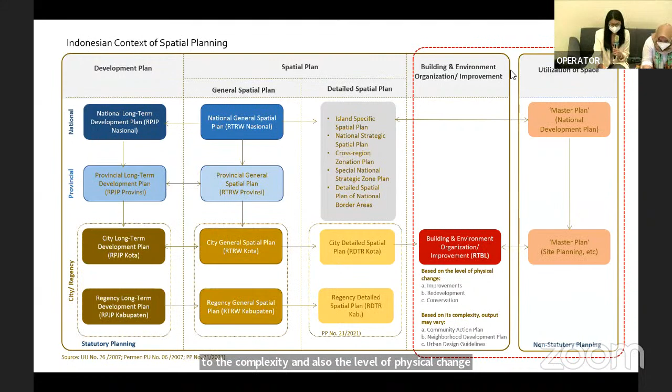So the urban designer operates within the red square. We can provide building and environmental organization in certain types according to the complexity and the level of physical change that might occur. Based on the level of physical change, we can see three categories. The first category is conservation, a strategy of regeneration involving minimum physical change.

The second is rehabilitation or improvement, a strategy that involves a medium level of physical change. This also includes the revitalization of pedestrian areas, revitalization of parks, and revitalization of kampung. And the third, or the last one, is a large level of physical change or intervention, called redevelopment.

I think one of the examples done in Jakarta is surprisingly SCBD. It was once a very low-density kampung, which was then turned into a very high-density strategic area that is now one of the most expensive and highly valued in terms of activity. It has become the center of finance and economy in Jakarta. And I think, in spite of the debates on the process of development, it sets an example of how regeneration at a larger scale can happen in Indonesia.

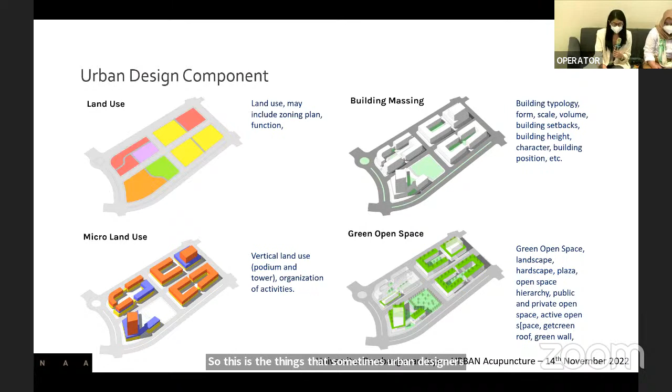Like one example in Jakarta is when it floods, and suddenly all the vehicular access is being blocked, and then it contributes to the economy in a very negative way. So this is also important for urban designers to address.

When we have a higher ratio, it means it can accommodate, it can cater more population density. And that's why in Jakarta, especially, intensity of building is higher than most areas in other cities because of that certain population.

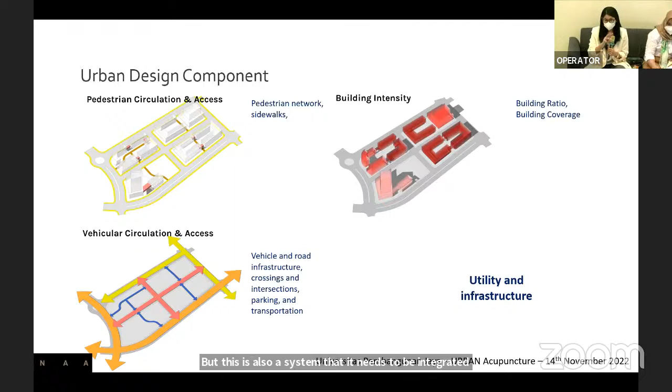So even nowadays, underground area is also being utilized to cater these kinds of movements. So there are a lot of things that we need to understand within the public realm of how the city works.

So I suggest when you go strolling in the city, you observe what kind of things are happening in our public realm, sometimes that's what I do. When we go to other cities, we learn about these components and how city managers manage them, so that we can learn from the positive sides to be implemented to the issues we try to tackle within our city. So that's one of the examples.

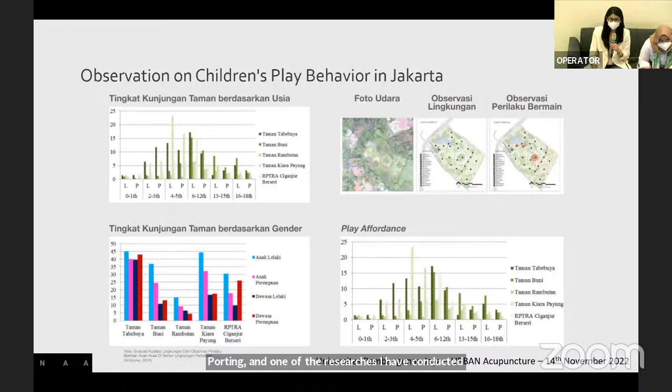So yeah, okay. So I think this is the last material that I would like to deliver. So we had the chance to revitalize a park in Jakarta, which is Taman Puring. And one of the researches I conducted during my master's degree on children's play behavior was implemented within the design. So I think this is one of the really good opportunities where we can create a safe space for children. And what we first conducted was to analyze the area and what kind of positive value and negative value it has.

So the Taman Puring area once faced degradation in terms of environmental quality due to its place. It's located beside Pasar Taman Puring, which is known for the illegal transactions of goods. And Taman Puring previously became a place where criminals stop by, and we find this very saddening because this area is highly potential, especially because it is located near several schools. I have not shown it in the map, but there are 2 elementary schools and 3 higher public schools that are complementary to the existence of this park.

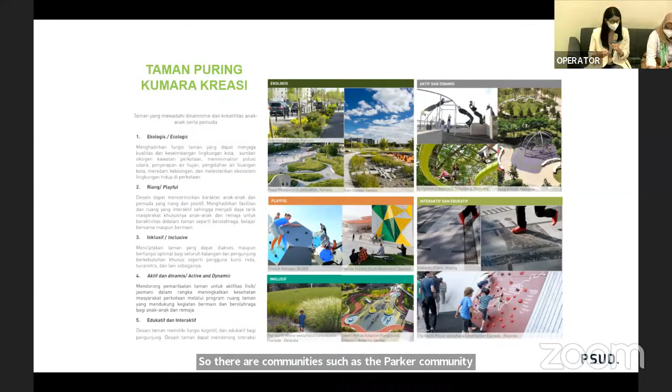And that's why we took the concept of making this park a play area for children of different ages. In the first process of this design, we visited the area and concluded what the people need by asking the children playing in that area, and also asking communities using the area. There are communities such as the Parkour community that has been using the area as a place for practicing. And we gathered information to understand what they need as users, and we tried to implement it conceptually within the design.

And I think it became one of the most successful parks in DKI Jakarta. This is probably one of the first playground areas that has high standards of playground, because at that time it was not familiar for public parks to have a very luxurious playground. You know, if mothers are aware, usually we try to find parks which are acceptable for our children to play. And I think that's one of the most important inspirations for me as a mother, to create better, safe space for my children.

And in that design process, I was very honored to have the opportunity to design with PSUD and the team to make this design very useful for the children. During the first opening ceremony, it was one of the places people in DKI Jakarta visited, and seeing this, for me and for the team that underwent that process, is relieving, because it can provide a better space than before. So I think this is one of the things designers can do, to create a better space and better environment for the citizens in cities.

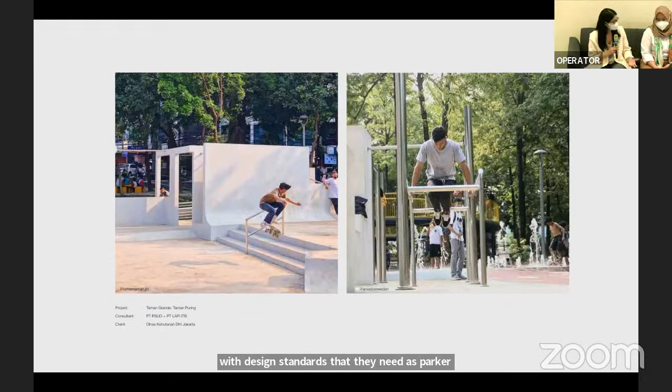So this is the Parkour community that we communicated with. One of the most interesting things is that we were able to communicate and exchange ideas. They provided us with design standards that they need as a Parkour community to practice, because we had no idea what they need, the kind of standards, the thickness of the steel and the kind of materials they need to use the space effectively. So I hope that fits the criteria of our acupuncture in this sense.

Okay. As I mentioned before, I think this is also a form of urban acupuncture, or as I said, a plug-in urban design that brings a lot of benefit to the city. Because of the congestion and other problems in Jakarta, the government of DKI Jakarta has tried to develop a transportation system which promotes transit-oriented development. And I think this is one of the things that also triggers more public spaces and better developments in the surrounding area.

So the impact of this infrastructure, I think we can all see that this is bringing Jakarta towards a better city. So I hope these kinds of initiatives and interventions can be done in other cities that need it, because not all cities might need it. So there need to be certain analyses and studies in order to make it effective. Thank you.

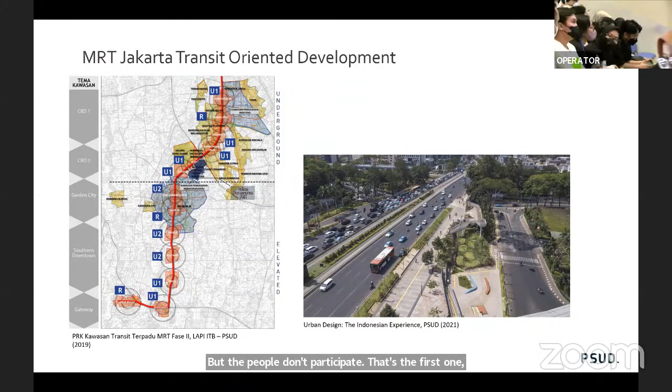What is CFW? It's the Citayam Fashion Week. Citayam Fashion Week, okay. Yeah, I guess that's it from me. Is that clear? Can you repeat the question? So what happens when we create an urban design intervention, but the people don't participate? Yes, that's the first one. And the second one? Did you forget your own question? Okay, let's just answer the first one first.

A feedback question I'd like to ask is, do you think CFW is a positive or negative response to an urban design? I know for a fact that this is Tasha's thesis. Why are you asking the question? This seems conspiratorial. For me, it's a good impact, because if there are activities there, it means the design is a success. But I guess they're causing new issues there, but in a good way. That's okay.

Responding to that, I think it's a very debatable topic. But I agree that CFW is a positive phenomenon of how the community is able to utilize a space created by the government. It's a public space that is livable and vibrant. It's also being discussed among urban designers that it's a phenomenon that happens temporarily, like a euphoria that emerges with the new existence of the public space.